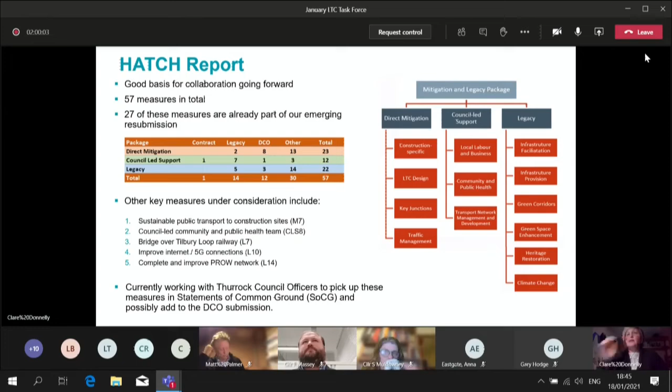I think we only had an hour slot, so I'm going to probably have to race through this a little bit. To introduce myself, my name's Clare Donnelly. I'm a lead architect on the Lower Thames Crossing project, and as you'd expect, I'm an architect by background, but I have a specialism of working very closely with landscape architects on large-scale infrastructure projects. This project, more than most, has really been an exercise in collaboration, both within a very large and diverse design team internally, but also with a large range of stakeholders externally.

My presentation is split into two parts. First of all, it's a little bit dry, it's more procedural about process and documents, and the second part I'm going to talk you through some of the key design components that we had in the last DCO submission. They were a snapshot in time because obviously since then we've started to work with Thurrock officers to develop those designs and those ideas further. So I'll talk a little about where we've got to in the design process, but also I'm going to signpost you to some important documents in the application documents.

Back in 2017, Highways England asked us to produce a design narrative, and that's essentially why me and my team were appointed. The design narrative was supposed to look at how the road and the highway structures could be integrated as well as possible in their environment.

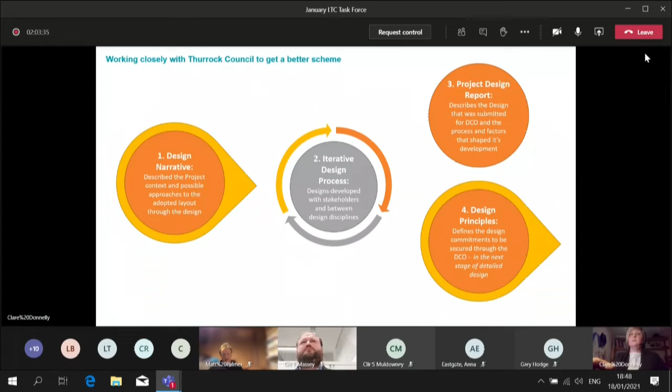Just to give you a little background about how that works in practice, we are at a preliminary design stage. So we've done quite a lot of work on the landscape, but some other elements like structures will be developed in more detail in the future, post approval.

There are layers of refinement that we've put in the DCO that reflect the process we went through. At the bottom of that, we have what we call the baseline design. This is a straightforward engineering proposal that has determined structural depths, the location of the bridge, its width, but not really anything about how the structure itself is going to look.

On top of that basic design, we layer additional design principles, which is the document I was just talking about. They're written design principles, and they'll talk about, for example, a particular material palette we need to apply on top of that baseline design, or text or other kinds of interpretation. It's quite a big document, and it's worth a good read. How that might influence the design is then illustrated in the project design report.

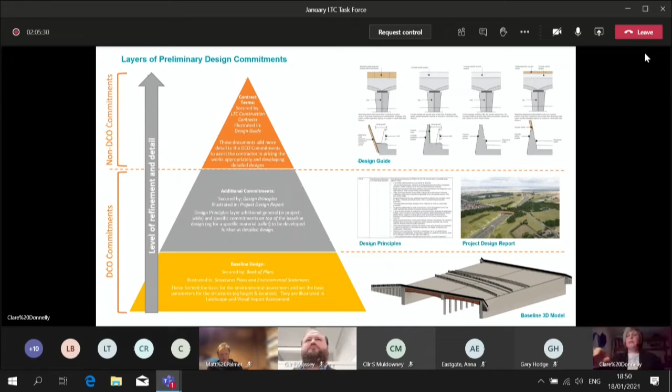After the DCO and approval stages are over, there are commitments we're making within the construction contracts, where we're asking the contractor to deliver us a high quality design. We've provided more details to guide them on how we would like those structures to look, so they comply with the design principles, which they can then take away, do all the technical work, calculate forces and construction details, and apply that in the finished design.

We have quite a big list of things we're currently talking to officers about, as well as other stakeholders, and this is just a selection of them. So we are developing and having active dialogue on quite a few of the things I will even be presenting to you today. So I'm now going to present proposals from the previous DCO application that we made.

A large part of our work has been in the landscape and also in the non-motorised user strategy work we did, which is on public rights of way. But today I'm going to mainly talk about some of the big structures that we will be building in Thurrock as part of the highways work.

My team were really interested particularly in the overbridges as they span over the LTC, because they provide these vital links that will maintain connectivity in and around the road alignment. So we did a lot of analysis quite early on, and we fed in, for example, how the green bridges should work, because they're not all the same.

Hoford Road, which has got this rural lane character that you can only get down by a 4x4, is going to be treated quite differently. Then the green bridges we're also providing at Muckingford Road and North Road, where it's actually really important to have those connections for pedestrians, cyclists and equestrians.

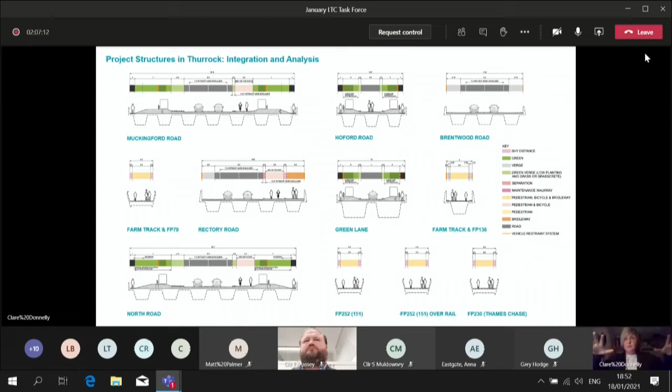So we looked and analysed all of those bridges, taking care to not just think at the edge of the structures, but to look at where people are coming from and going to, and how those structures will be used. We started to drop them into categories, and through that analysis we worked out how they would fit in that environment, how the edges work, how the integration works.

We noted that some structures would require improvement on that baseline design. Before we decided which ones, we went and spoke to Highways England Design Review Panel, which is an independent design review panel, and we selected some to become enhanced. I think it will become quite clear when I talk you through one of those proposals at the Mardyke why we needed to enhance those structures.

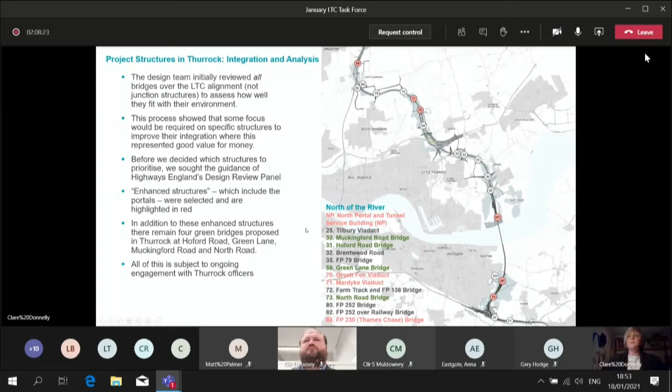We've enhanced in the north with the sort of pink ones here: the North Portal Tunnel Service Building, the Orsett Fen Viaduct, the Mardyke Viaduct, and the Thames Chase Bridge, which connects both sides of Thames Chase Community Forest. But in addition, it's important to remember that we've had quite a lot of close landscape integration work on the green bridges as well, at Muckingford Road, Hoford Road, Green Lane, and North Road.

Even if something is grey on this list, we are expecting a high quality and good design for those structures. These are just two extracts from that design principles document I was talking about, where we're talking about how buildings and structures should be integrated seamlessly into their landscapes. I'm not expecting you to read and absorb this now, but the idea is there's a level of detail above what you'll see in some of the drawings.

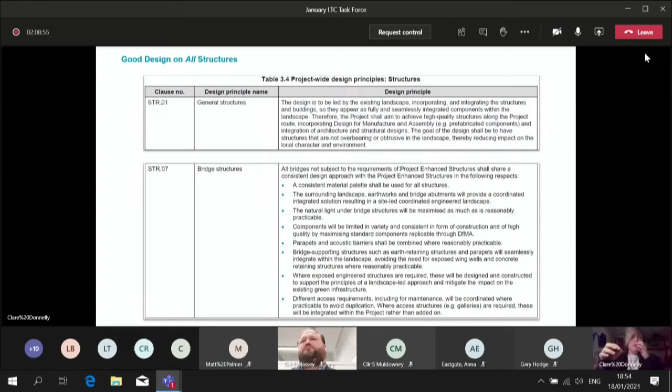It's quite important that they are similar to each other to an extent, but then we have to remember that actually they're in completely different landscapes, and need a completely different approach to both the engineering and its integration into that landscape.

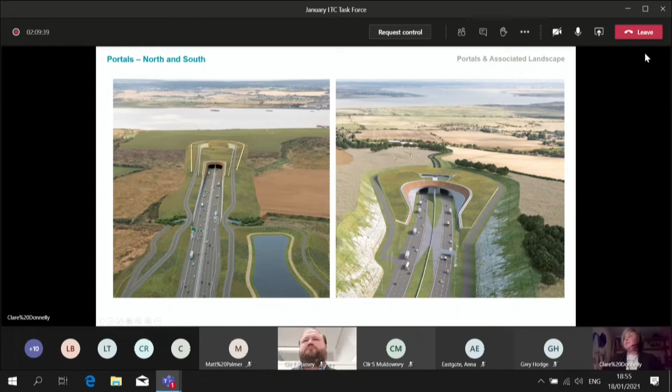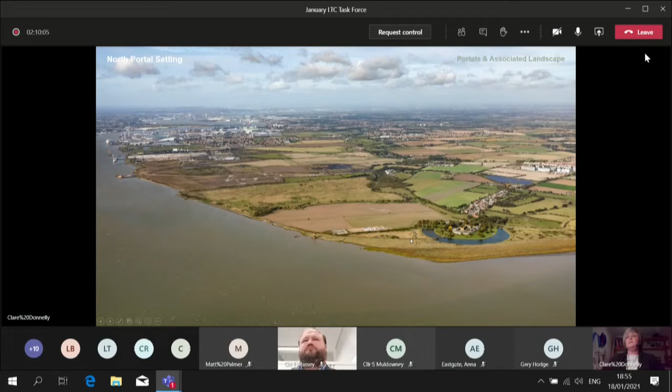Whereas the South Portal is in this rolling hill, in a 30-metre deep cutting, at the north we're in a landscape which was originally marshland, and has been highly manipulated by man throughout its history. It's incredibly valuable because of its close relationship with the river, and so you see a number of structures along this stretch of the river related to defence, agriculture, landfill or industry.

The view from the other side - this is our site here. It's a particularly challenging site to design for because it's in the middle of a PFA extraction and landfill operation, so the land is literally shifting and changing as we're trying to design for it. It's also important to note that it's in a flood zone, so with a critical piece of national infrastructure, we need to protect the road itself from flooding, but also make sure that in the event of a flood we can maintain emergency access.

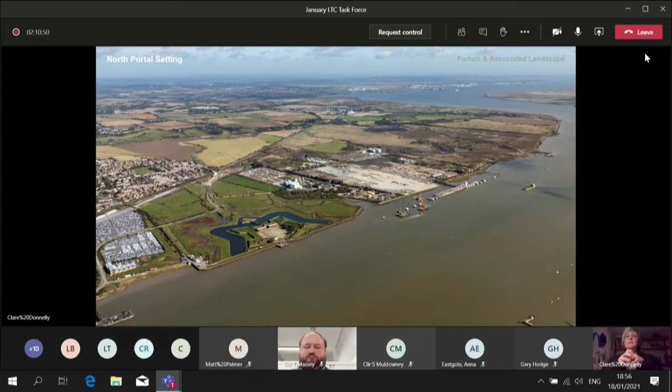The structure itself is surrounded by bunding and earthworks, and there are two access roads that come along, sitting on top of a bund and wrapping round the structure. This is the portal, the tunnel aperture, and it sits in a hollow. We've tried to bury all of the structures that sit above ground within the landscape, with the raised access roads coming round the sides.

I do apologise, that's my phone. Oh shush.

There is also a building - this is the tunnel services building. It has a green roof to try and integrate it within the landscape, and it slopes down as it slopes up from the tunnel, just gently lifting up towards the end. Both the North Portal and the South Portal have a quite restrained palette of materials, but both are characterised by this strip of weathering steel which wraps around the main portal aperture.

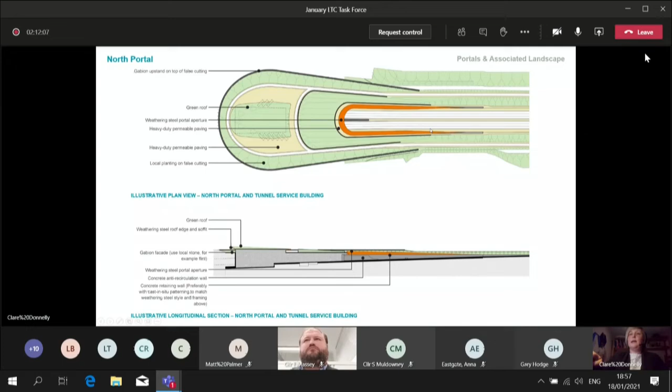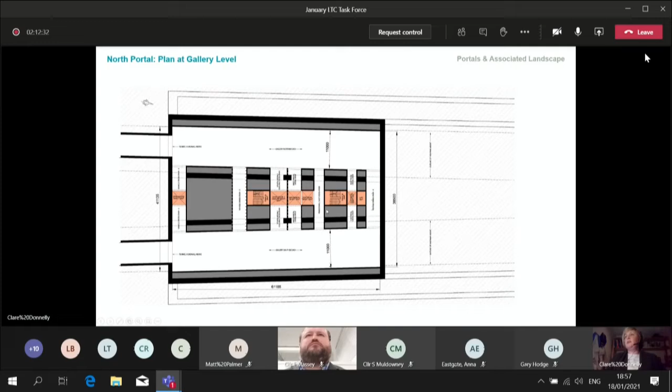The location of the building is constrained by the means of access to the tunnel below. This is a plan taken through the tunnel openings, and there are a series of accesses required for emergency access and maintenance access into a gallery that sits below the main running tunnel. We had to put these structures in the box section, and that has then constrained the design and location of the building.

This is the tunnel services building. It's a substantial building, about 82 metres long by 41 metres wide, but the majority of it is for kit - either M&E kit or firefighting kit, including some quite seriously large storage tanks which are required in the event of a fire.

Any buildings, any sort of rooms for people are concentrated in this corner, and it will be the main corralling point in the event of an emergency for emergency services to get together and manage the event at that tunnel.

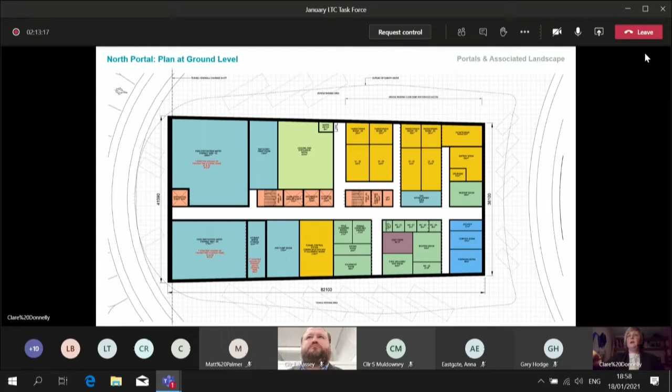You can see here just a little bit more detail about how that sits in the landscape, recessed behind earthworks, lower in the landscape, just to try and keep the impact of that building as low as it possibly can be, with the green roof on top.

We have just a couple of notional elevations. We were looking at the fort elevations here, so it's quite a blank elevation - there's not a need for a lot of windows. In actual fact, what we need to do is make sure this building doesn't overheat because of the amount of M&E kit in there. So it's a very simple, consistent material palette with the weathering steel roof. We wanted to use local stone gabions wherever we could in the facade, which helps with the thermal mass of the building and keeping it cool. Finishes like permeable paving are also really important to us, making sure we can be as sustainable as possible in the design of that building.

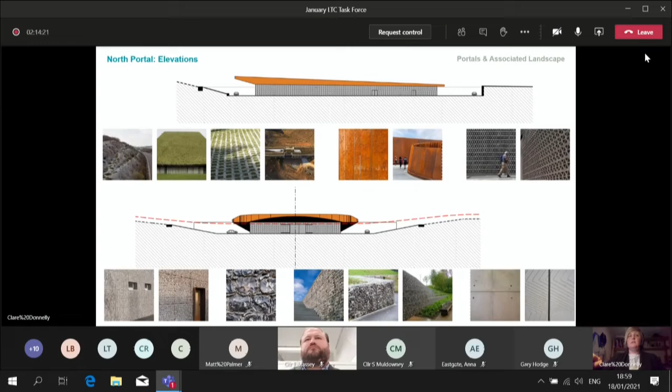Returning to this area, we looked at the history of the area, and it is an amazing landscape, but because of that history and the man-made interventions into it, we were particularly inspired by the defensive history of the area. Because of the bend in the river here, it's had this important role in the defence of London and the UK, with Tilbury Fort and Coalhouse Fort being particularly important there. But there are also a number of other fortifications and batteries along this stretch, and we felt it was under-celebrated.

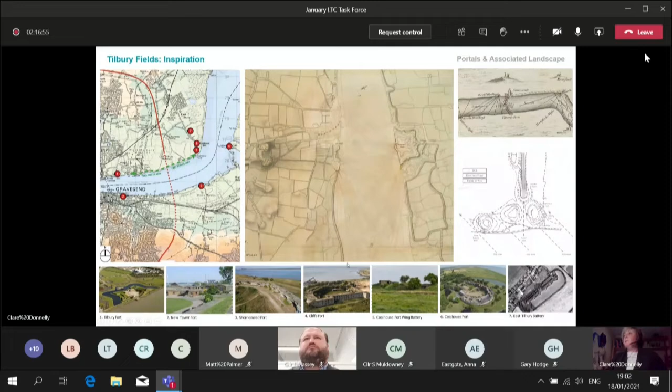As Gary mentioned, we're looking at the Two Forts Way. At the moment we're doing additional work to work out how this could work better, with a stronger and reinforced route across here, and also looking at the landscape mitigations and planting that we're putting on this site.

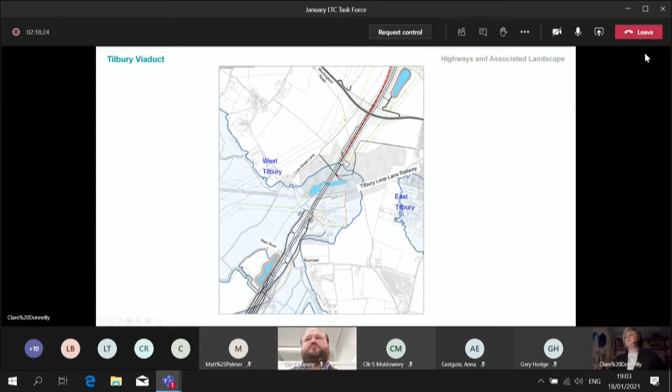Moving north, I'm going to look at the Tilbury Viaduct. Just to the north, we have the Tilbury Viaduct, so we're looking at the portal down here. The road rises up onto embankment and then ultimately onto a viaduct structure, which allows us to get over the Tilbury Loop railway line. It's quite a clean structure, long and thin, and because it's going over the Tilbury Loop railway line, it's required to have a minimum of 6 meters clearance between the railway line and the underside of the structure.

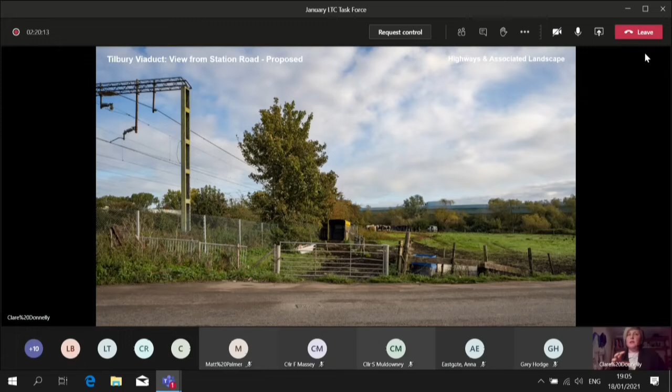It's actually quite hard generally - I've done lots of different viewpoints of this one, trying to get a nice close look at it. In order to get a good visualization of it, you do have to go off the public routes. So we did a CGI, not a photo montage, from about here, so that you can get a look through and under.

And so this is the design of the Tilbury Viaduct. You can see it has a V-shaped pier form, which is good - it recesses that structure and the bulk of that structure below. It has quite a good height, which allows you to get those glimpses of sky on the other side, and it sort of sits in this natural bowl.

So things that we will be working on in the future is the integration of acoustic barriers and parapets along the top, and also just making sure that the abutments at either end are as well integrated into the earthworks as they possibly can be.

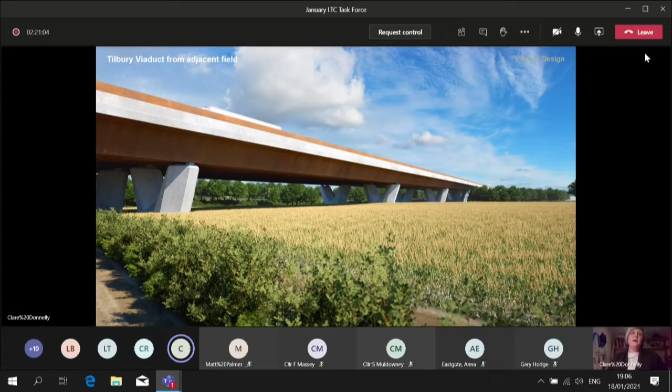Finally, I'm going to talk about the Mardyke Viaduct. So the Mardyke and Orsett Fen viaducts are what we call enhanced structures, and I think it will become clear as I'm talking why we felt it was really important to expend a little bit of additional effort on the design of these structures.

The Mardyke and the landscape around it in this floodplain is really quite beautiful, and as the officers told us, one of the best examples of fenland outside of London. We have this very flat open plain, with the Mardyke itself running through here, giving really long views across the landscape and up to the higher ground of Basildon and Brentwood in the distance.

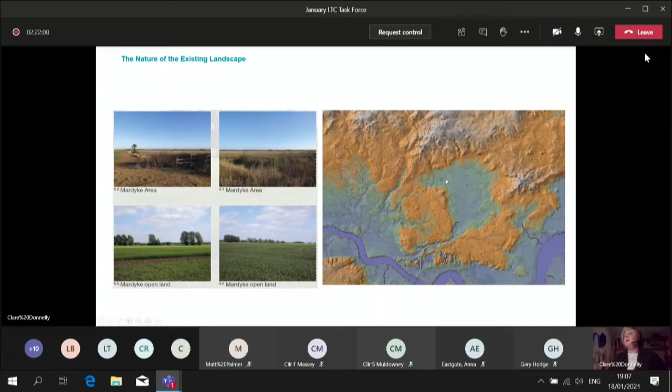So it has this sort of really tranquil sense of remoteness. There's not a huge amount of development within the body of the fenland itself, and that made it also a focus for green infrastructure. Early in the design process, we worked with our environment colleagues on mapping all of the green infrastructure projects in the area.

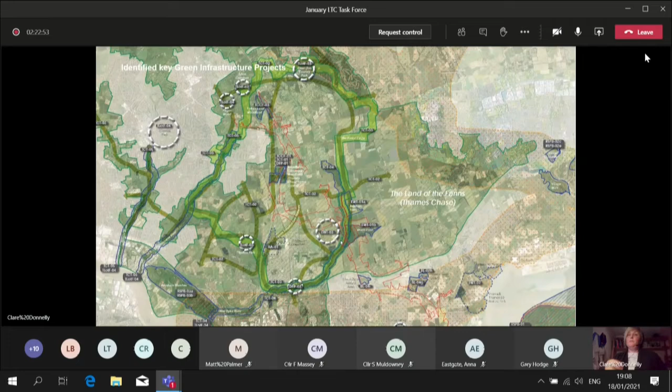We noted that this stretch, which is the Mardyke Trail, was particularly pivotal in a number of different routes, including what we call the Forest Loop, which links up to Thames Chase. So key moves of our strategy around non-motorised users - pedestrians, cyclists and equestrians - has been to link up these routes and try to make this route as pleasurable as we possibly can.

So we had to get over these. The alignment meant we would need to be above ground in the floodplain once again, so that the road doesn't flood during flood events. So it's raised up along there, but we also had to be mindful that we couldn't put a huge amount of earthworks in there, because that reduces the amount of flood storage available within that floodplain. It's a balanced approach between the two long viaducts and then a stretch of embankment in between.

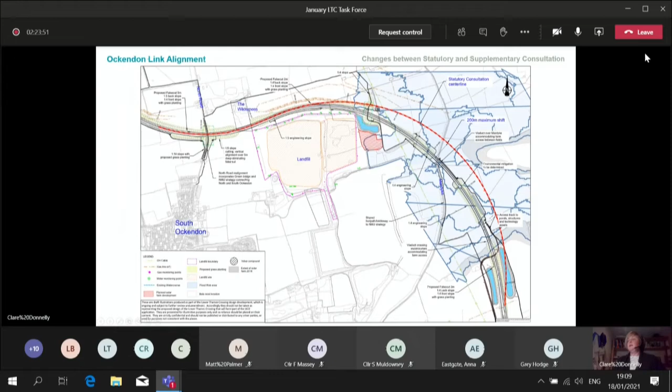Our approach to landscape in this area was, because we knew we couldn't use screening earthworks like we do in lots of other places - we have an awful lot of false cutting along the project, where you effectively build a small linear hill either side of the road, but that takes up more of that flood volume - we knew we couldn't use that screening approach we'd normally use to obscure or hide the road. That meant we had to do two things.

One, we looked at an approach to re-wetting the landscape. That fenland landscape has been drained and used for agriculture for several years now. Within these pockets, what we've done is remove that drainage, and hopefully it will return to wetland in the longer future, which is good for both improving views across the landscape and creating a more interesting foreground view, but also for biodiversity. I also understand it's possible it will improve some of the flood characteristics of the area.

We've also got some woodland planting to screen and break up the stretches, particularly as we transition from embankment to viaduct along these areas. And we're also trying to link up the public rights of way - these are completely new public rights of way that will link footpaths in the north with Green Lane in the south, hopefully making that network of public rights of way a little bit more coherent.

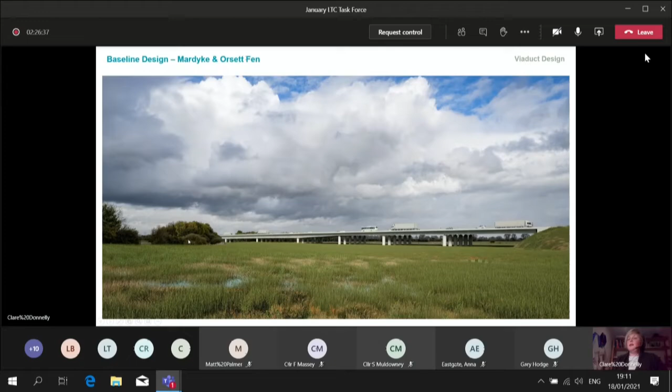But what we wanted to do was try and maintain some of those views for the users of that public right of way, and try and keep a more open sense for those people who are crossing the fenland landscape.

So working with our engineering colleagues, we looked at different approaches to see if we could have longer spans generally, equal spans, and follow a different structural approach so we wouldn't have that restrained headroom right at the point that people walk. We explored a number of different structural approaches, looking at the form of the piers too, because we can't plant in front of it, since it's a flat open landscape. The appearance of the piers is particularly important for the Mardyke.

We agreed that this was probably the best approach because it means we've got that raised headroom right in the middle of these arches, which is where the watercourses flow and where people want to walk. It has a good rhythm as it crosses the landscape. We've recessed the pier slightly and given them a triangular form, so there's not such a strong line on the horizon, and you can still catch glimpses of sky and views through and across that fenland landscape.

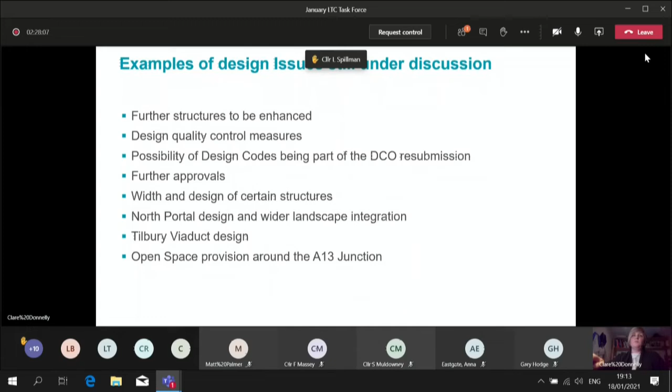So that is a whistle-stop tour of those three areas of design. We're also still talking to officers about different aspects of the design shown on this list, and it will get longer, I'm sure, as it develops. And then I was going to go for questions.

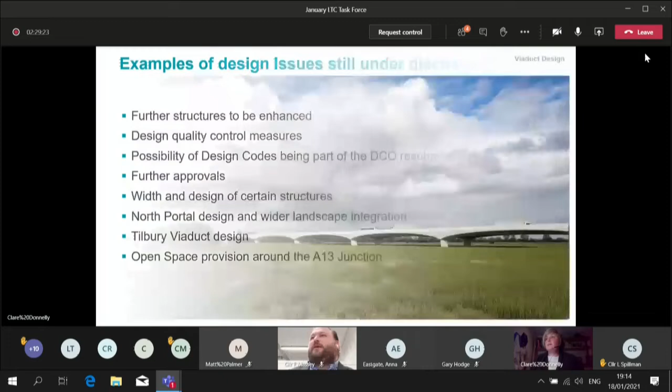I don't know, let me go back. The reason we haven't done that is because the landscape character that exists is fenland, it's open, it's flat, and you get these really long views. If I foreshorten it with woodland planting, it's out of character with the current landscape.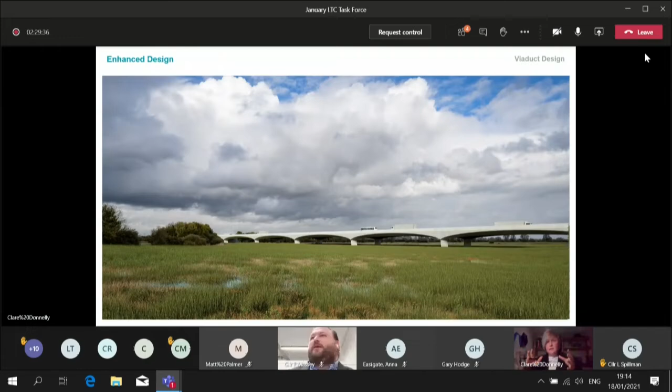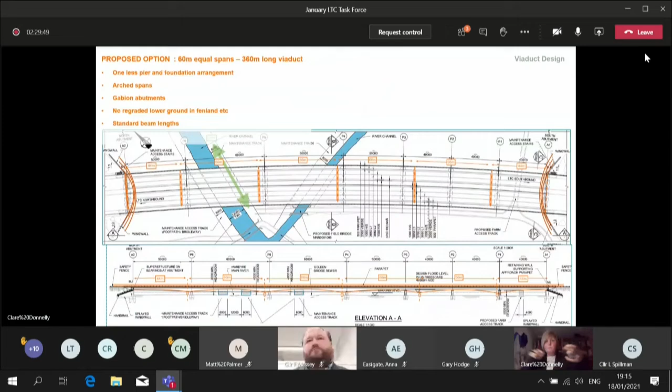But what you do have in the current landscape is these blocks of woodland, usually at the corners of fields, sort of marking the edge and boundaries of things. So what we've tried to do is replicate that approach to landscape in the design. There we go, so you can see these kind of blocks.

If you look at area 3, for instance, you've put in a strip of woodland there. Why don't we have a more ambitious programme and turn that whole area 3 into woodland?

Because we want to turn it into wetland. We want to return it to this fenland character. So the woodland we're providing will break up the edges of the structures we're putting in, but we don't want it to be the dominant feature in that landscape. That's generally the approach. We have put huge amounts of woodland planting in around the junctions, massive swathes, which when mature will hopefully screen a lot of those structures. But that's because it's appropriate to the landscape that exists at the moment in those locations.

Whereas here it's that more open and flat landscape, that sense of remoteness. What I would like out of this project in terms of these mitigations is for you to add real social value to the natural areas. Now, fenland doesn't have much social value - in its very nature, you can't go on it, it's too wet. And these strips of woodland, although they obscure, that's all they do. They don't have any social value, they don't become areas where people would want to go. That's the sort of thing I would like to see in this scheme.

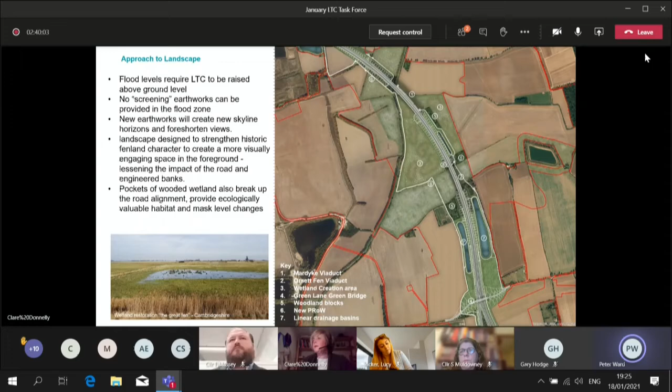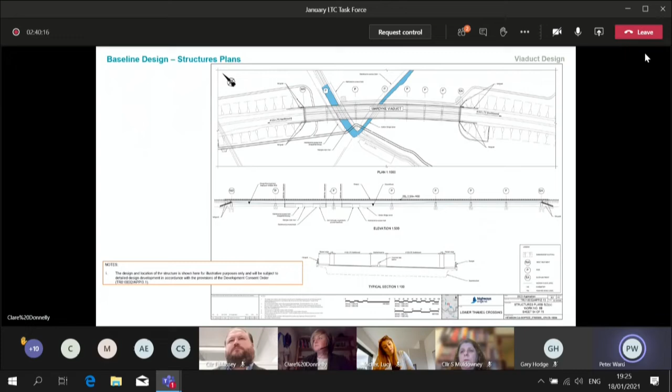The other point I wanted to make is looking at that design, there's a couple of new things I obviously haven't seen before because you've changed them. One is you've got a water vole area where the tunnel emerges on the Essex side, and the other is the bridge over the railway line. Now, I know there's not a link road, regrettably, into Tilbury, which we think there should be - I'm talking about this from a business perspective, as the business rep. That's something we've had lots of dialogue on with the Lower Thames Crossing team. One of my questions is, there is a potential link road in Highways England's plans for the future - it's not in this scheme. I'm assuming these changes don't impact on the future capability to deliver that link road, particularly given we have an imminent Freeports bid into government, which we believe between us and London Gateway will generate about 20,000 new jobs. So it's quite important that business has those links in the future.

I'm not going to go over the fact it's not in the scheme because everybody from Highways England well knows my feelings on it. But I'm assuming that doesn't inhibit that link road going in, those changes that you've made to the design.

It's a highways question, so I'm going to throw that one to Gary. Hi, Peter. Yeah, obviously on your first point, I know we're in discussions with you on the construction traffic and things like that, so I won't touch on that.

But on this one, what we've done is we've tried to keep the area clear of the main utilities, so that we haven't precluded the introduction of a junction at that point in the future. There's the attenuation pond there at the moment, which might have to be rearranged, but that's really the only thing. With any design, when you get to the detail of it, we've got emergency access roads going through there at the moment, and they might well change if at some point there is a junction in that location.

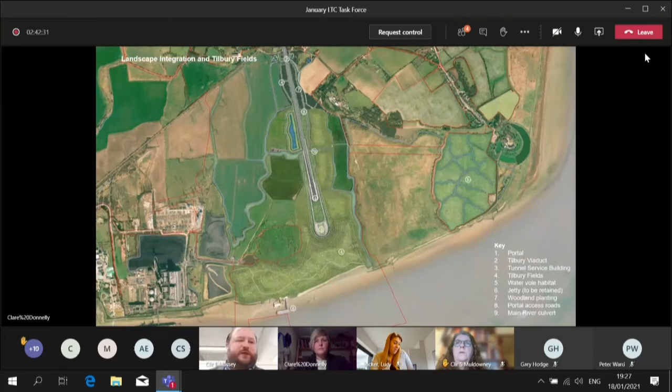So I'm just trying to see how that would look. Would the bridge go underneath the LTC but above the railway lines? So it's 6 metres from the ground rather than 6 metres above, and that gives you the clearance for the overhead lines and the trains. So it's not 6 metres on top of that.

And then Gary: yeah, if there was anything going over the top, the LTC would be... if you wanted to take it over, you'd want to take it towards the tunnel portal where we're coming out of the ground. So it would only be at about 7 metres above the ground level at that location, so it would be a similar height to what the viaduct is.

Brilliant, thank you very much for that explanation. Lucy, who's next please? It's Laura Blake next.

Laura Blake: thank you very much, thank you both for your presentations. I'm sure when we've had a chance to look through, I know we're very limited on time for you to present it tonight, but I'll have lots more questions which I'll email through. But just a couple of points to raise.

Firstly, very topical at the moment in Thurrock, the flood aspects of things. Are you currently reviewing the impacts of flooding in the areas that LTC will run through, because obviously we've had a lot of flooding in the past few days, week? So when you're taking into account all these floodplains and the work you've been doing, was that done on a dry day in the summer, or are you now looking at worst case scenario to make a full assessment of the potential risks?

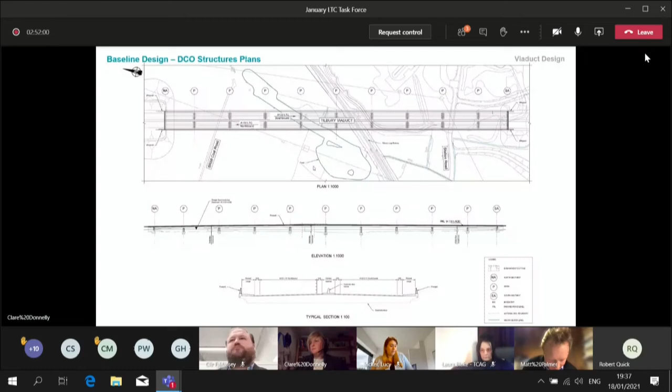Okay, let me jump in and answer, Gary, and you can add where I get it wrong. On construction, that's one of the reasons we're considering another consultation, so we're working out how best that could fit in and how best to represent the information meaningfully. We need to think about the visualization piece, and we can come back to you on that. We've got some nice pictures of some nice structures, but what we now need is meaningful views from locations that you guys feel are valuable. That's probably where we've got a gap, and we need to work on it.

Does that answer the question for you, Robert? It's answered one part, on the construction phase. What about the areas on the route that pass near housing? I said we need to work on that—we'll take it away and come back to you. Oh, okay, I didn't realise you were answering both questions with one answer. Thank you.

Councillor Muldowney: Thank you, Chair. Sorry, I've just got one question I forgot to ask earlier, but can I echo what Laura said and what Robert said? It's really important that we get these details ahead of time now. If you want to show that you are being more cooperative, we need them as soon as possible before the resubmission of the DCO. But my question was about bridleways—we've got a very large, keen and enthusiastic horse riding community within Thurrock, and hardly any bridleways.

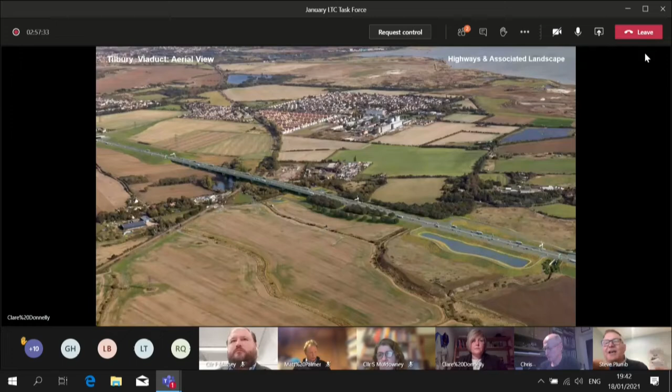If I can jump in as well, following on, I've been dealing with the wider green infrastructure, including the rights of way improvements throughout the process. Certainly one of the things we've been working on is not only the upgrades, as Clare suggested, but one key thing is, when you get to sections of road such as the Muckingford Road and North Road, how the links along those roads ensure that if you've got horse riders, cyclists, or walkers, there are safe routes to link to the new sections of bridleway. So we reasonably now have a route which runs from the Thames Chase centre near Upminster through to Coalhouse Fort, and the issue now is how we can get the spurs off of that to start forming a proper network.

Does that answer your question, Councillor Muldowney? Oh, brilliant, thank you. It does, and I'll be delighted to see that green infrastructure presentation come, especially if it's to the next meeting. Yeah, I think we're all appreciative of the extra level of detail we've seen tonight, and I know there's a fair few more questions. So, Lucy, who was next, please? We've got Councillor Allen and then Councillor Rice left.

Councillor Allen, please. Thank you, Chair. I think my question would probably be best aimed at Gary, and it's regarding the Tilbury Link Road. So basically the question is, why has the Link Road been taken out of the proposals? Is it merely because it blows the budget? Because it would suggest that the Link Road would alleviate traffic movements from the other Highways England road, the A1089, the Dock Approach Road, which we know has the Asda roundabout currently on 19,000 vehicle movements per 24 hours. So I would have thought the Link Road would have taken quite a lot of movements off the 1089, which would have been a good thing. So if you could answer why the Link Road was taken out of the proposals, thank you.

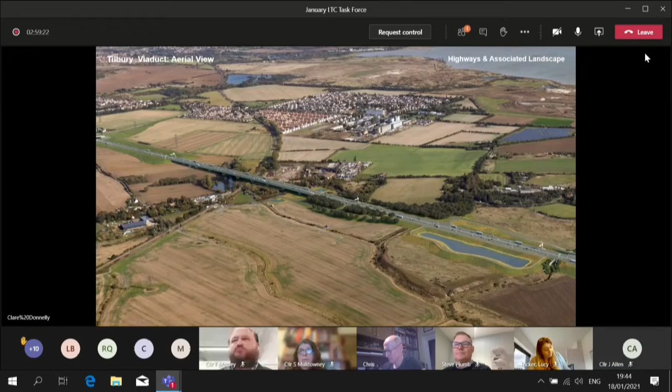The Link Road actually was never... what happened was, back in, I think, November 2019, it was included in a scoping document that went off to PINS, and it was an option we were looking at that stage, and we hadn't completed all our work on where the traffic was going to flow on local roads. In completing that work, we were trying to simplify the A13 junction, and it was felt that by taking those two movements out, it would actually help. But we found it didn't, in the end. We wanted to remove the connection at the Brentford Road because of the connection to the A13 at Orsett Cock, since it meant there would be quite a large scale flyover having to go across the top to take the movement from LTC North going eastbound on the A13. So in developing the scheme, the compromise was that we put in the links needed at the A13 junction, but the Tilbury link we decided not to put in, because it was going to get inappropriate traffic on inappropriate roads, and that's one of the reasons we removed it. It's still being looked at in RIS 2, and potentially in RIS 3 of the future programme with Highways England.